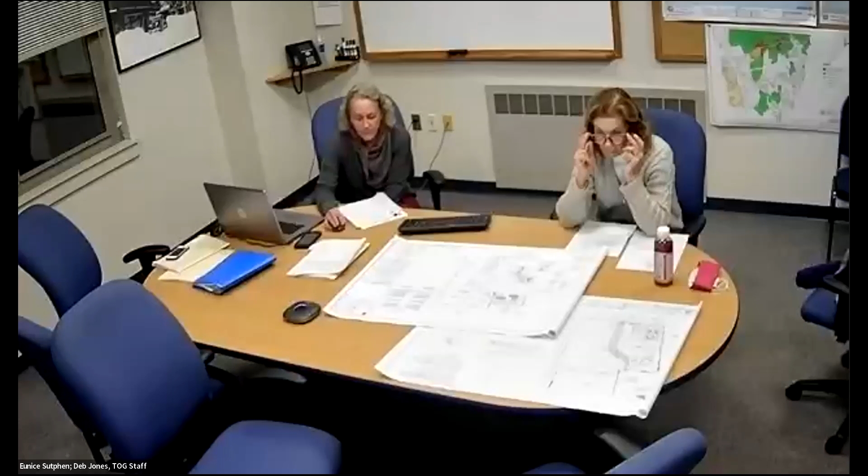Yep, we are. So this is the December 8th meeting of the Groton Inland Wetland Agency. David Scott is the chair. Staff tonight is Deb Jones and Bruce Lofgren. With me tonight is Eunice Sutphen, the vice chair. So there is a public hearing tonight. There's also a public communications section on the agenda.

In order for the public to address the commission, you will need to raise your hand. On an Apple device, you can find that at the top of your screen. On a PC, it's at the bottom. On the phone, it is *9. If you're an applicant, we will recognize you when your agenda is up and promote you to be able to talk to the commission. All right.

This is a continuation of a public hearing. And we have a full complement of people, so we're all set. The applicant's going to make a presentation first. Comments will be received from staff and inland wetland consultants hired for the third-party review. Inland wetlands members may ask questions. Then the public will be asked for comments and the applicant will respond to comment. All right, so we're ready for the applicants.

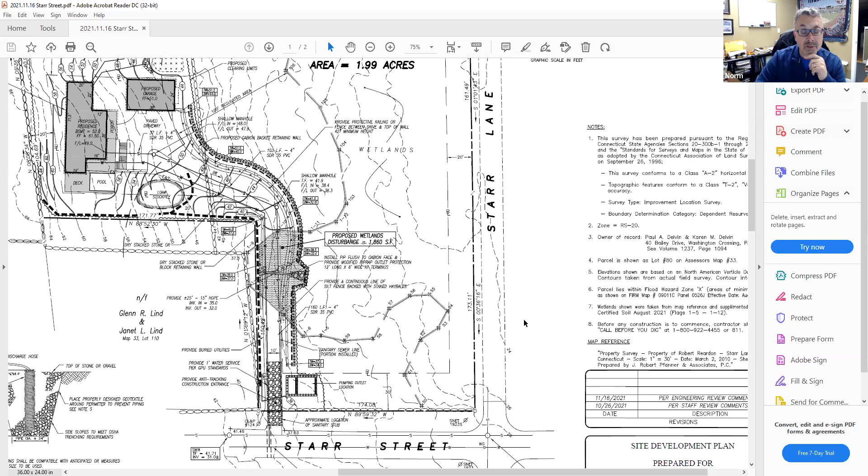So lastly, I want to talk about, I think if I recall, there was also some discussion about the possibility of using pervious pavers in the driveway or for a portion of the driveway. I think the studies are pretty clear that pervious pavers here in New England really aren't a very good alternative just because of the freezing conditions that happen. They don't plow very well. They certainly shouldn't be used in steep situations, which is what you have here. You have a 9 to 10% grade on the driveway.

And even if it were a warmer climate, where these pervious pavers were utilized more frequently, they're not used on steep slopes. You really have to have flatter areas. They're used in parking lots, or they're used in overflow parking areas sometimes. But for a driveway of this type, it's really not even a feasible alternative, because it doesn't really give you any kind of advantage for infiltration.

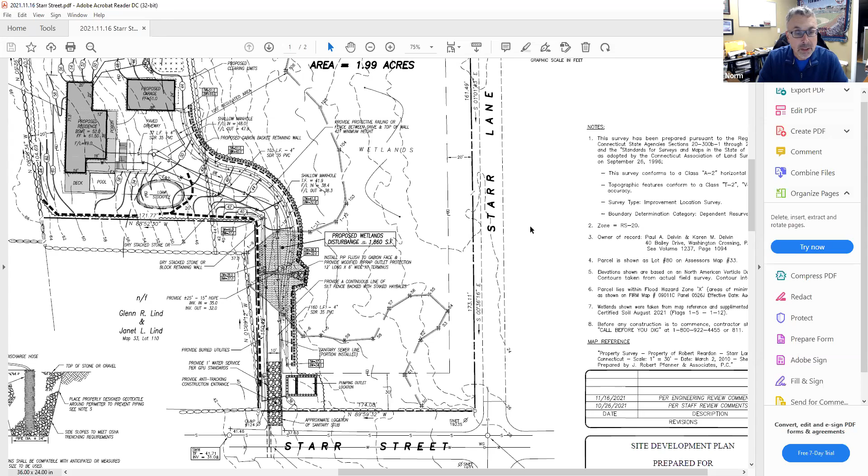We will have some infiltration of the roof water due to the rain garden, and we'll get that first 1 inch, which is the most important part of the runoff to capture and treat, because studies have shown that first 1 inch would be the portion of the runoff where you could potentially have some sort of pollutant. So with that being said, I'm going to ask Ian to discuss the wetland characteristics themselves, and we look forward to your questions afterwards.

Good evening, everybody. For the record, Ian Cole, soil scientist, professional wetland scientist out of Middletown, Connecticut. Thanks, Norm. Thanks, Attorney Williams. You guys did a good job summarizing everything to date. Just to add on to what everyone said tonight, to revisit when we met the last meeting, revolving around my October 27th letter that was submitted to the record. A couple of key points just to highlight, which I think we've already discussed tonight.

But one, with this being an existing lot of record, the proposal as presented is a reasonable way to access this property in an intelligent manner. Essentially, we're crossing the wetland at the narrow spot. We're crossing the wetland at a low quality point, an area of disturbance. This is an addition to the wetland boundary since the 2010 approval. We've discussed some of the speculations of why this wetland is now here when it wasn't before.

Partly, it could be due to the original installation or the start of installation of the driveway, basically taking off that top superficial material and intercepting down into the dense glacial till and intercepting the high water table, creating a condition where we get groundwater exfiltration, and we start to see the point of origin of discharge. And then it's somewhat exacerbated by land use changes in the watershed above it that have increased surface runoff as a contributing factor. So now we're left with this new wetland source.

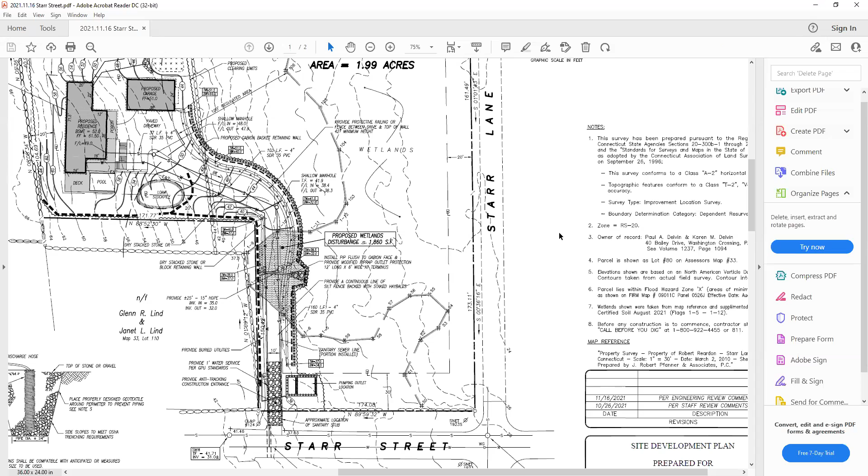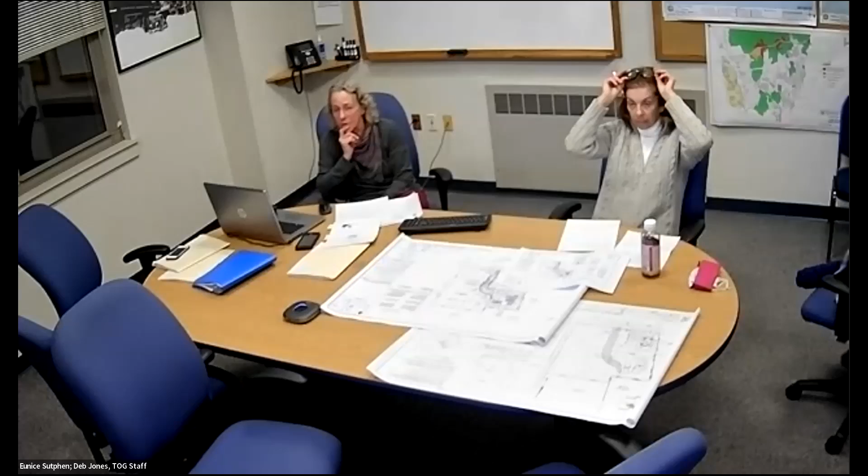All right. Bob, are you there? Can you hear me now? Yes, we can. Thanks. Great. And hopefully you can see me as well. Actually, right now we're still looking at Norm's screen, which is the plan. Okay. So would you prefer? Actually, it's up to you. It would be fine to have the plan up as well. You probably don't need to look at me.

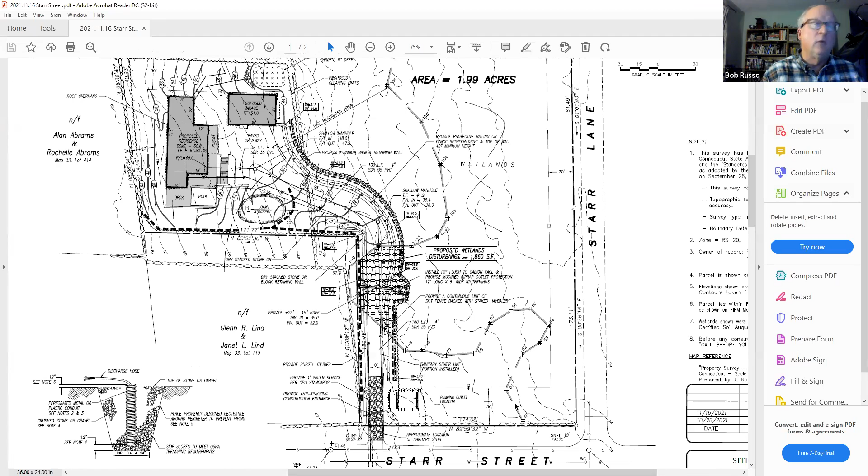First of all, I'd like to thank the commission for the opportunity to perform the third-party review. We do appreciate being asked to submit a proposal to do that. I would like to review the work of Ellen Bartlett of CLA Engineers and myself. Ellen's a PE. I'm a certified soil scientist, both employed by CLA Engineers. We reviewed the plans and responded to the commission's requests, and I would like to go through the primary areas of our work.

Just to recap, we did a review of the plans. We offered comments on those plans. We specifically looked at some areas of interest to the commission. One, the delineation itself. Why would such a delineation change since 2010? And two, alternatives that might be available, and what would be the most feasible and prudent alternative for a driveway onto the site.

In terms of the comments that we offered on the plans, we requested that a dewatering detail and plan be added because we anticipated that, given how wet that area of wetland was when I was out there to visit the site, and I did visit the site after your last meeting and prior to this meeting, we thought that dewatering would be likely needed during construction. The applicant's engineer, Norm Tebow, has provided that, and we feel that that addresses that point.

As well, we asked for some computations for the riprap at the outlet of the pipe that's going to go under the driveway. And again, Norm Tebow has addressed that. And we feel that those technical comments were properly addressed.

Well, I would like to ask, if I could, Mr. Cole to address that, Mr. Chairman, because as I mentioned earlier, of course, we're charged with looking at whether an activity that's in the upland review area is creating an adverse impact on wetlands. And I understand that the commission is asking, is it possible to have less presence in the upland review area? But I think the question is whether that kind of change to the layout that's preferred here will create less of an impact to wetlands. And so I'd like to ask Mr. Cole to weigh in on that, please. I think that might be helpful.

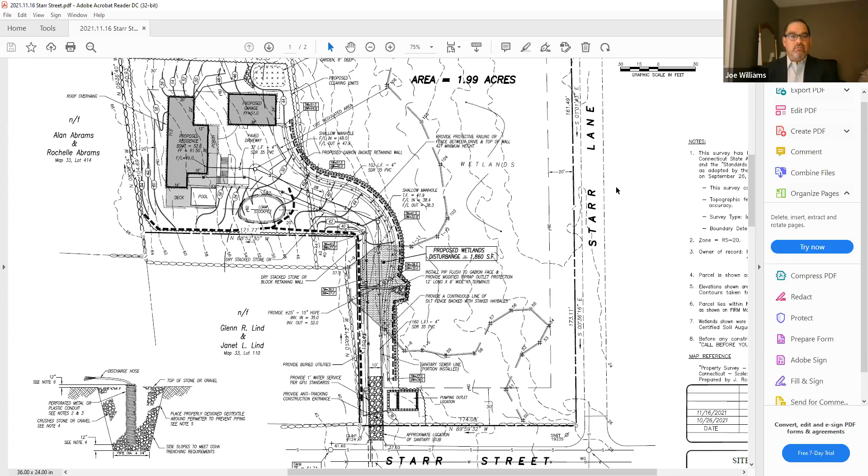Sure, for the record, Ian Cole, soil scientist of record for the project. It would be my opinion that shifting a building 2 feet would have really no measurable effect. You're looking at overall limits of disturbance. It would still be within the overall limits of disturbance. So the habitat amount of change is already within that envelope. So a 2 foot shift, I don't see where there's a benefit. So my brain defaults back to the feasible and prudent alternative analysis that was just discussed. What is the benefit in doing so?

You don't think that 2 more feet of a grassed area for water to move over has any effect? Is that what you're saying? Saying it doesn't have a measurable or impacted effect. The stormwater, if you remember, the first 1 inch of stormwater, which, Norm, please correct me if I'm wrong, accounts for generally 95% of most of our rainfalls that are encountered. That's coming from both the proposed residence and the garage and is being directed to the rain garden. So we're still treating the stormwater that's running off, still dissipating that flow. So no, overall speaking, in terms of scale and scope, I don't know that there's a quantifiable benefit there from a 2 foot shift in the building.

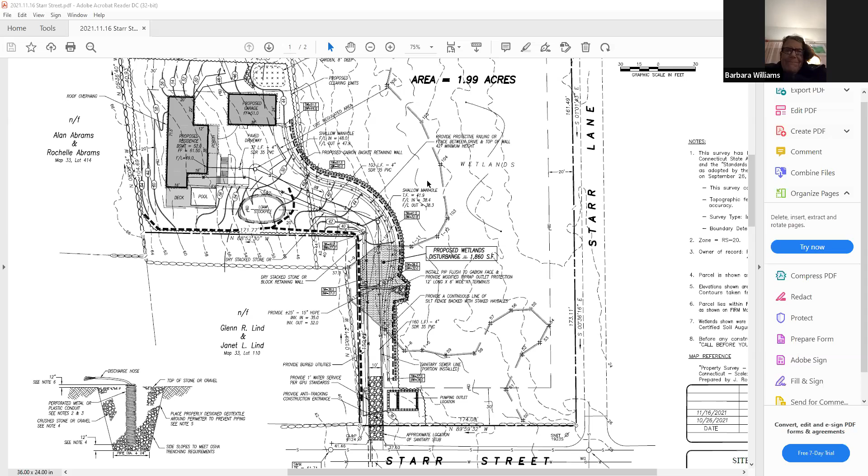All right, other comments? Other information that's needed? All right, then I'll ask for a motion to close the hearing. So moved. Do we have a second? Second. Gary, you seconding? I thought somebody else just seconded, but I'll second, sure. All right. Discussion? All those in favor signify by saying aye. Aye. Aye. Opposed? Abstentions? All right, the hearing is closed. Now we can discuss it.

Gary, you have a question or a comment? I'm not exactly sure procedurally what's happening now, okay? Are we still in a public meeting, or are we having private deliberation? How's this work? We're not taking any new information. We can discuss what we've heard amongst ourselves.

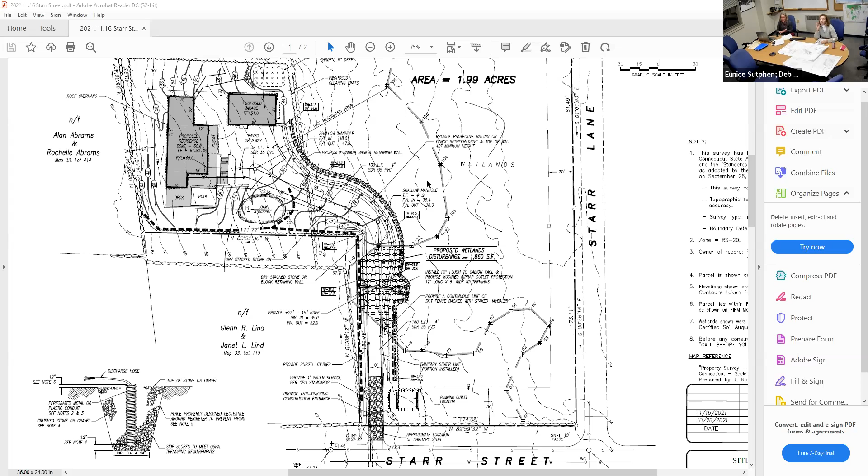And I just want to remind you that while Barbara Williams is here, she's not able to participate because of technical issues. So Gary is appointed as a regular member in her place. And I'm sorry, Courtney, you can't participate in the discussion.

All right, and so I'm looking at the map right now, and although we were focusing on the area where the road basically crosses that wetland area, I wonder what might potentially happen on the other side of that gabion wall, okay? Whether it be something associated with redirecting runoff or groundwater discharge, and or, as you already mentioned, things like pesticides and salt and whatnot, because that's right there.

The other side of that wall is the wetlands, and I'm sorry we didn't ask Bob Russo about whether or not he might anticipate something going on the other side of that wall. And given the nature of the soil, I've only had very limited experience myself dealing with gabion walls, and this is a pretty steep drop. We're talking a 9-foot wall here.

To me, that very steep border basically has a dramatic impact on the groundwater discharge, particularly perched water discharges. I don't know if it's good or bad, but that's something I would like to have seen focused on, perhaps. And I didn't really think about it till now. So that's my only comments.

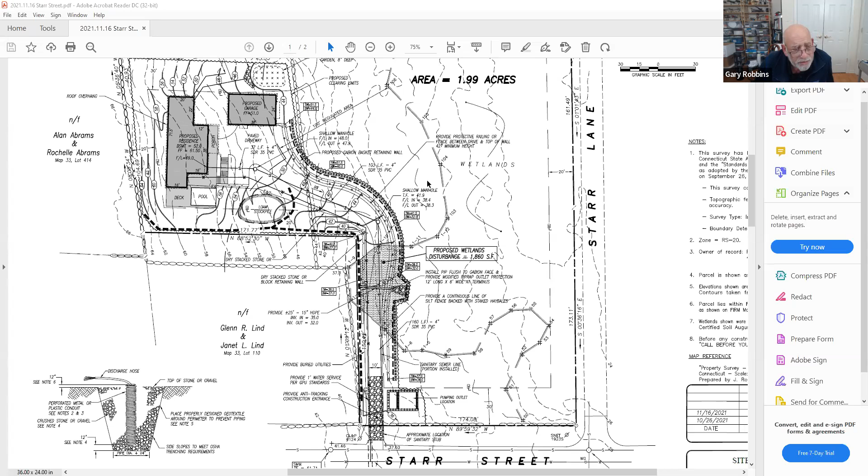Well, I think the applicant and the expert that Deb hired on behalf of the agency spoke pretty clearly to the gabion wall actually being protection for the wetland. He didn't go into a lot of detail about the construction, but at the end someone asked a question and he said they would only have to dig down half a foot or so. What did he say? About half the height of the first basket, yeah.

But let's keep in mind that wall is 9 feet high. You got a 9-foot high wall, and the soil on one side goes basically all the way to the top, right? And then they're going to add additional soil on top of that, and I'm listening to issues associated with perched water, and I just wonder whether or not the hydrology could be impacted by this. In the end, this may be a real maintenance issue if there is some sort of wall failure or whatever. And I don't know.

Again, I'm just guesstimating some things that potentially could happen to the wetlands in terms of pesticide, salt coming in, changing the hydrology as a result of having this large wall there. I don't know. I appreciate the fact that the engineers have addressed its structural soundness per se, but overall, how it affects the hydrology in the area, I'm not sure that we heard a lot of, and perhaps we could have heard some more.